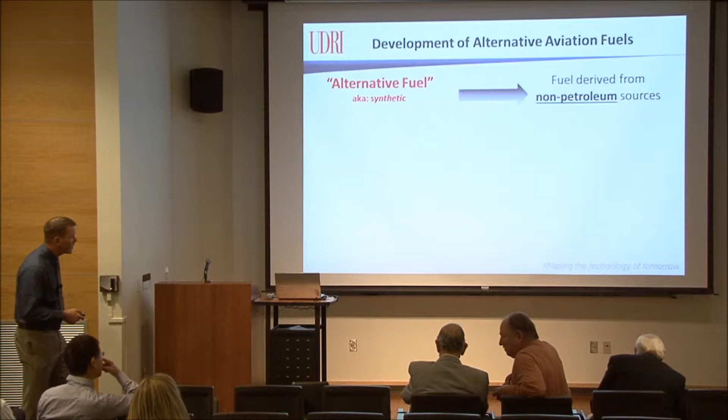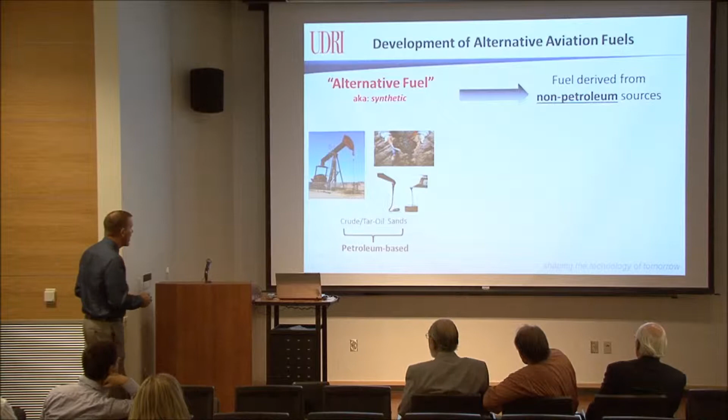So simply stated, an alternative, or you'll hear me use the term synthetic fuel, is a fuel that's derived from non-petroleum sources or feedstocks. Gasoline, diesel, and jet fuel that you're typically used to are derived from conventional or heavy crude oils or non-conventional petroleum feedstocks like tar or oil sands. An alternative fuel could be derived from other fossil sources like the liquefaction of coal or natural gas to liquid fuels, or biological feedstocks like plants, algae, or animal waste.

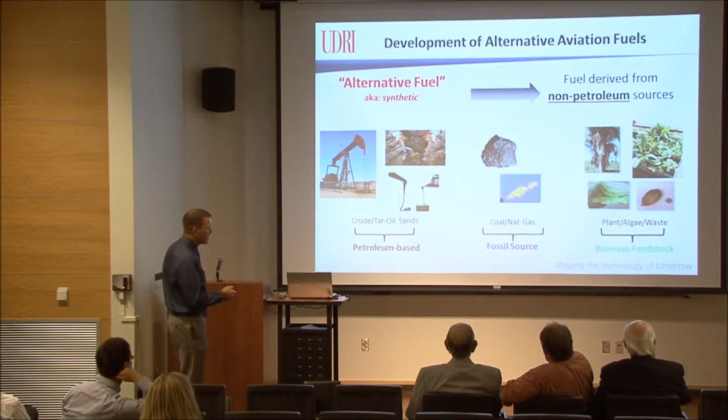Now, this latter category is probably what most of you in the room think of when you hear the term alternative fuel. There are several motivating factors driving the interest in the development and use of alternative fuels for aviation applications, and these can be broadly classified into four primary categories, as recently summarized by Hileman and Stratton in a publication. I'm showing these four categories here in a Venn diagram, and you'll see this consistently with the criteria I show on the next slide, because we need the right combination of these factors in order to have the motivation to pursue the use of these fuels.

Now, for simplicity, the impact or magnitude of each of these factors are drawn to be identical, but they can vary substantially depending upon many factors, like the geographical location where you're producing these fuels.

First and foremost, a fuel has to be economically sustainable in order for us to pursue it. Some of us in the room are old enough to remember the oil embargo in the early 70s. When petroleum products were pulled from the US market, there was a lot of investment and interest in alternative fuel development. But once those crude products went back in, a lot of that investment and interest waned.

There's obviously environmental sustainability motivating the use of these fuels. In particular, many of you probably think of the potential impact of CO2 and greenhouse gas emissions, but it's not only when we use these fuels and burn them, but what's produced or emitted as we're producing these potential fuels. There are other air quality impacts to consider, like the fugitive emissions during the production and burning of the fuels, and an often overlooked resource is the water intensity of your processes—how much water is needed and the quality of the water.

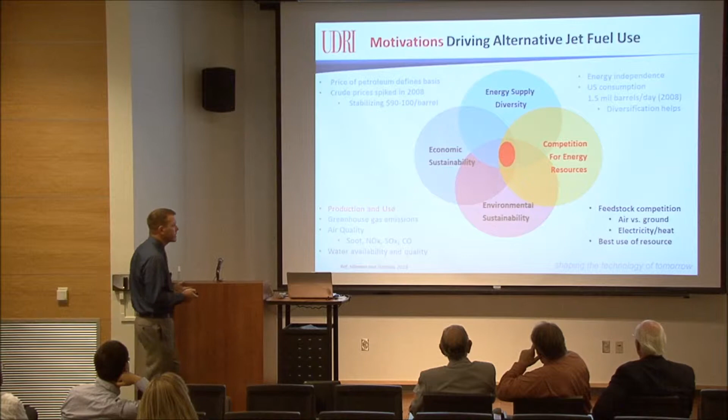This is difficult just due to the sheer magnitude of the volumes of fuels used in this country, but any diversification helps. The last driving force or motivation is the competition for these resources. If a feedstock or a source can be used to produce an aviation fuel, it can probably also be used for ground transportation, or to generate electricity or heat. So what's the best use of that resource, not only from an economic standpoint, but from an environmental and sustainability standpoint?

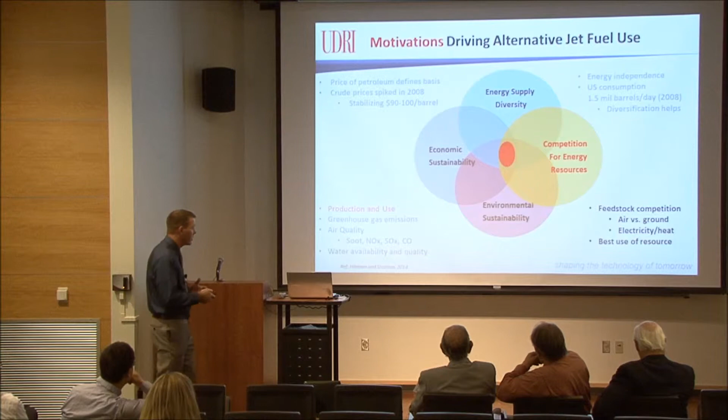So as you would expect, the criteria in which we evaluate a potential fuel echo these motivations very closely. A fuel is only going to be able to be pursued and become sustainable if it's economically viable. This can be complicated by the fact that policy and incentives can affect the prices that go into this, like tax incentives given for ethanol production for gasoline use.

Another limiting factor for the aviation industry is that any alternative fuel that's developed has to be fully compatible with existing infrastructure and aircraft, just due to the longevity of these systems that are used.

So we basically term that they have to be drop-in fuels compatible with the petroleum-derived fuels.

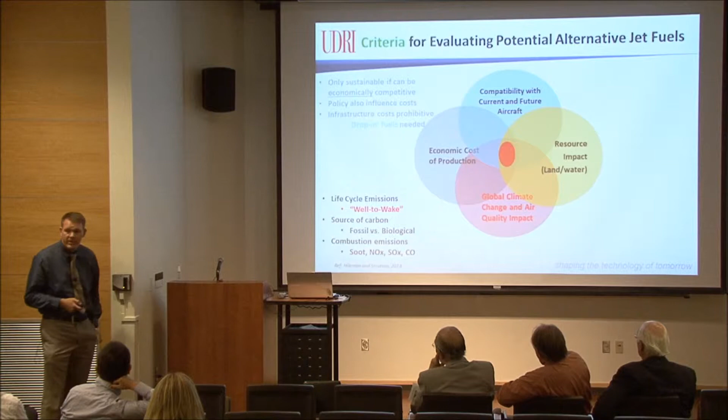There's global climate change and air quality impacts that we have to take into account in our criteria. You've heard this in maybe life cycle analysis or life cycle emissions, and you'll hear the term well to wake—everything from getting that feedstock out of the ground or growing it all the way to what we use it for. What's the impact there? It'll be impacted by factors such as where the carbon's coming from, if it's a fossil carbon or biological source, and the emissions when it's used.

A fuel has to be compatible with both legacy and future aircraft. As I said before, on the economic side, it has to be able to be used in existing infrastructure and aircraft. It has to meet specification fuel requirements—these are properties that when a fuel producer makes a fuel, we evaluate certain properties that have to be satisfied before it can be sold in the open market. It also has to satisfy what we term fit-for-purpose properties, which I'll talk about in a couple slides. And then the other criteria we have to think about is our resource impact.

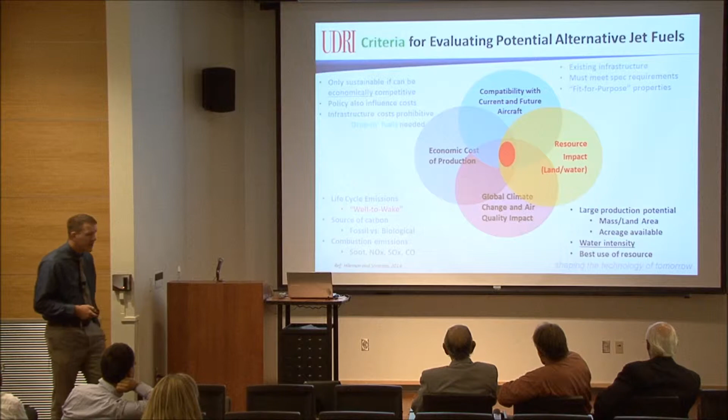We'd like to have feedstocks that have large production potential, but we got to account for the resources that are going to go into those and the best use of that resource.

We have to have many safety of operation requirements due to the conservative nature of air travel. This includes being able to safely handle these fuels on the ground and when we're putting them into aircraft. We have to have good thermal stability characteristics—we basically don't want to foul our fuel passages or nozzles in the combustors during flight. And we have to have good fluid properties, especially at the very low temperatures that can be encountered at high altitude flight. There's a myriad of other properties and characteristics we need, including appropriate fluid properties and compatibility with airframe and fuel system components.

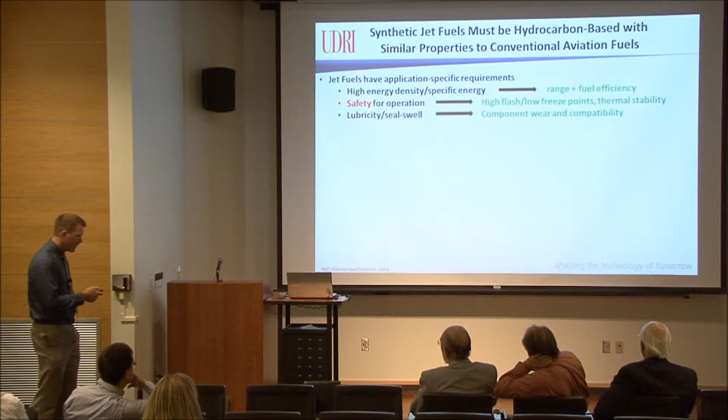So with this in mind, a lot of the fuels or chemistries that you've probably heard of for alternative fuels—biodiesel, alcohols like ethanol and butanol, liquefied natural gas, and liquid hydrogen—are not suitable for aircraft use because of many of these concerns. They're much more suitable and can be implemented in ground transportation applications.

With respect to aviation fuels, the types of chemistry and the compounds that are going to be produced and be viable to be used on aircraft are going to look and smell a lot like the chemical classes and compounds that you have in petroleum-derived fuel: branched and linear saturated hydrocarbons, cyclic hydrocarbons, and aromatics. But a big key here is understanding which classes do you want and which classes are beneficial to be implemented within aircraft applications.

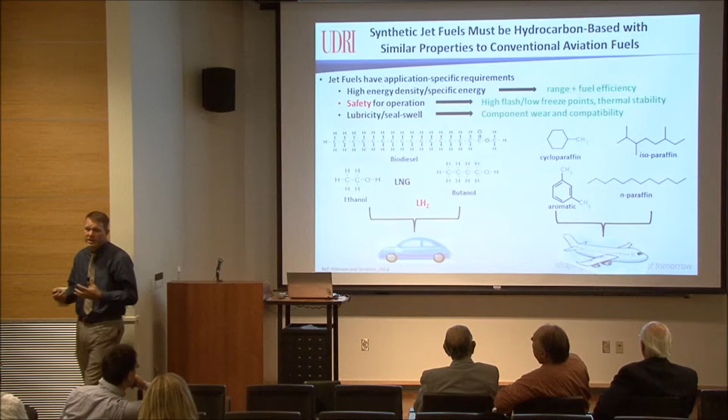There's a myriad of feedstocks and processes that you can use to produce an alternative fuel. Commonality to all these is that they're typically going to require hydrogen addition at some point to remove heteroatoms like oxygen, sulfur, and nitrogen, and right now they're going to have to be blended with petroleum-derived fuels for use. A complication for aviation fuels is that right now these processes can only produce a blend feedstock that can go into petroleum-derived fuel, and each pathway and fuel has to be approved individually.

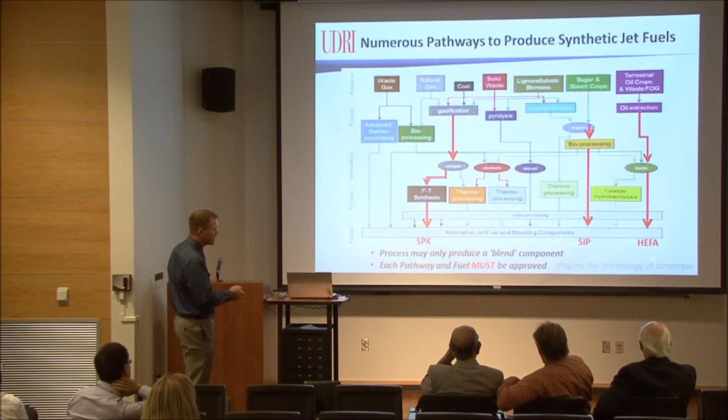Thus far, there have been three pathways that have been approved for use in commercial and military aircraft. This includes gasification of carbon sources to produce synthetic paraffinic kerosenes, conversion of triglycerides to hydroprocessed esters and fatty acids, and the conversion of sugars to synthetic isoparaffins.

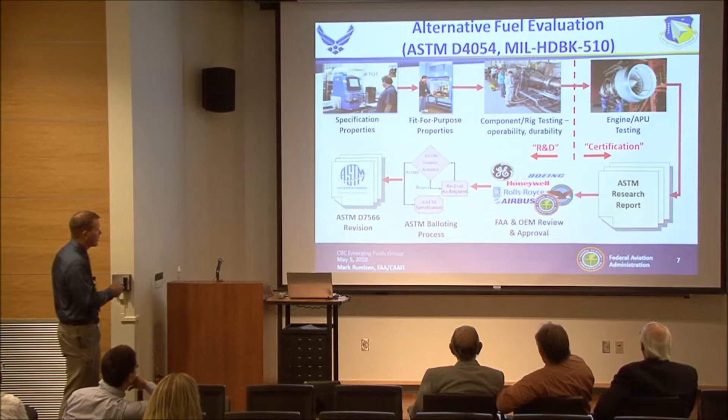To assist in improving the speed and efficiency in which we can get these fuels to market and get them approved, there's been a standard process developed to provide a framework for the certification and approval of new chemistries. These can be divided into two basic areas: research and development stages, where we characterize the physical and chemical properties of these fuels and understand how they're going to potentially impact use on an aircraft, and certification activities, which could include full-scale engine testing, airframe testing, and review and approval.

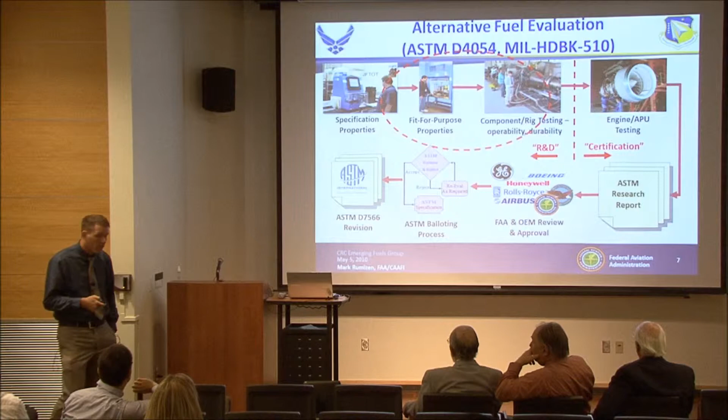Within this process, these upstream research efforts—especially correlating and understanding property-to-performance relationships—are critical, because we can define and learn a lot about the potential viability of an alternative fuel or alternative fuel chemistry using small volumes and relatively inexpensive tests before we scale up. With AFRL colleagues, we've developed a lot of expertise improving these property-to-performance relationships, and you'll see this term again, fit-for-purpose property, so I might as well define it.

For a fit-for-purpose property, what we mean is it's a property inherent to a petroleum-derived fuel that's not controlled by specification. As a petroleum-derived fuel is developed, certain properties have to be evaluated to sell it on the open market. Those properties were defined such that as long as those primary properties were satisfied, secondary and tertiary operational requirements of these fuels would be inherently solved.

But this isn't guaranteed when we introduce alternative fuel chemistries into use. It's not feasible to directly evaluate all of these characteristics during procurement, but as the end user, you want to make sure you're getting the performance that you need.

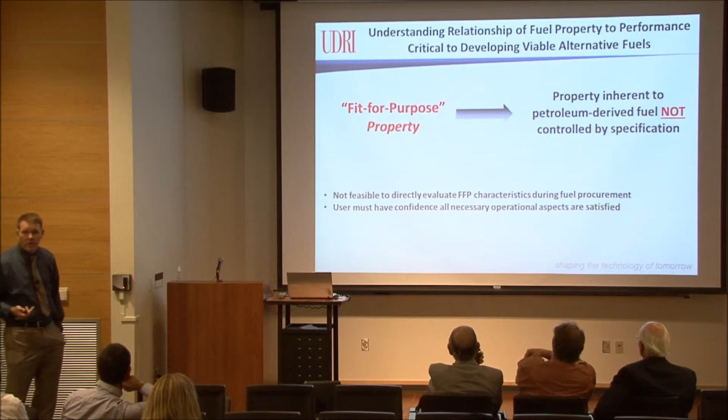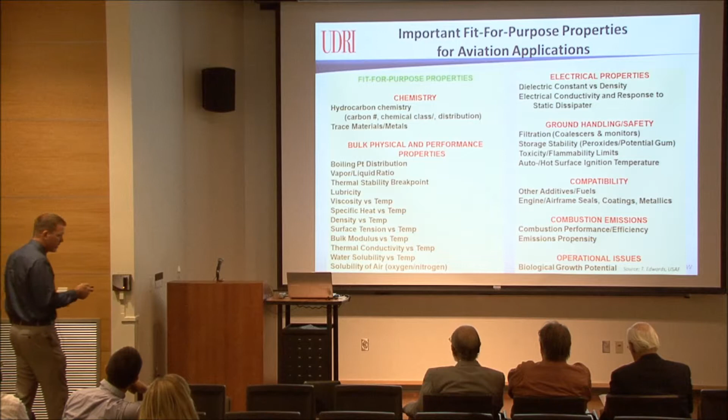These are areas where we've developed a lot of expertise and helped advance the knowledge with both DoD and Air Force colleagues, but also other OEMs, airframe component and engine manufacturers. I want to touch on some of those areas and give you a highlight of some of the accomplishments we've made. But before I do that, I want to mention a very important occurrence.

About 10 years ago, the Air Force made the strategic decision to certify all of their aircraft fleet for operation with a blend of petroleum and synthetically derived fuel. This was a major undertaking, involving activity from the research effort all the way up to engine and aircraft OEMs to flight certification. A lot of this work was initiated out of AFRL with our direct support and contributions, including understanding property to performance relationships and how physical properties vary with blend ratios.

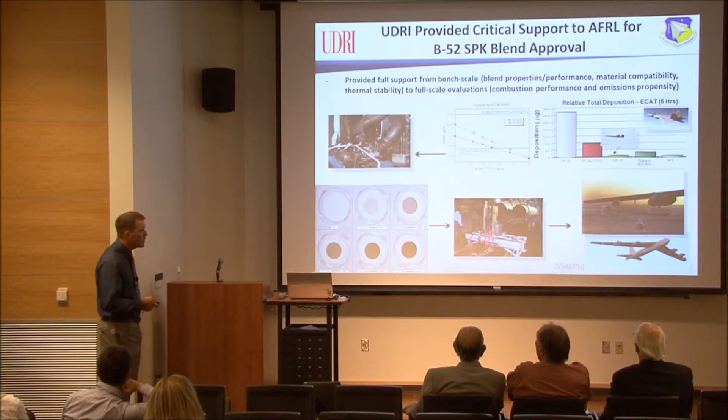We did a lot of the initial combustion evaluations to make sure the fuel would burn satisfactorily. One of the things we observed was the potential for reduced sooting or particulate matter emissions with these fuels. We supported extended durability and on-wing testing on the B-52, the first aircraft platform certified for alternative fuel use, by performing emissions measurements. I mention this because it really catalyzed interest both from a government and military perspective, but more importantly, a commercial perspective to pursue, approve, and certify alternative fuel use for aviation applications.

As far as some specific examples of areas where researchers at UD have made substantial contributions, I've mentioned a few times the relationships of property to performance. How does specific chemistry affect our operational needs? There are conventional techniques that exist for characterizing fuel chemistry, but for the level of detail we need for some of these new chemistries, conventional techniques won't suffice.

So researchers like Rich Striebich, Zach West, and Linda Shafer with us are developing and improving analytical techniques such as multidimensional gas chromatography. What that allows us to do is separate these fuels all the way down to the individual molecular level, which gives us a much better opportunity to correlate composition to performance.

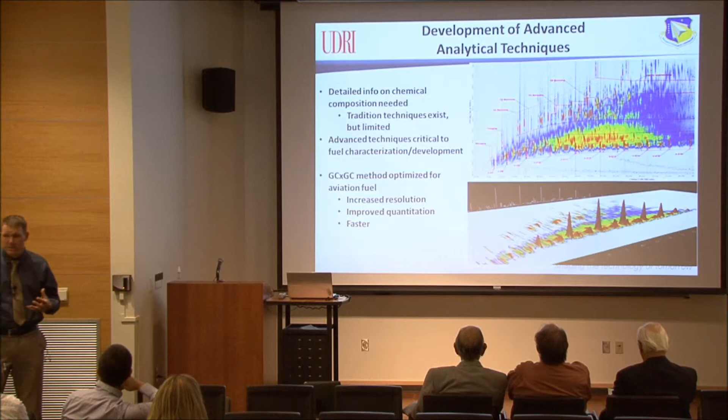Obviously, a need you have from these fuels is efficient and effective combustion performance and thrust. You want to be able to fly your aircraft. We've done a lot of work with aircraft OEMs and AFRL understanding how fuel chemistry will affect combustion performance, using research combustors both at AFRL and here on base.

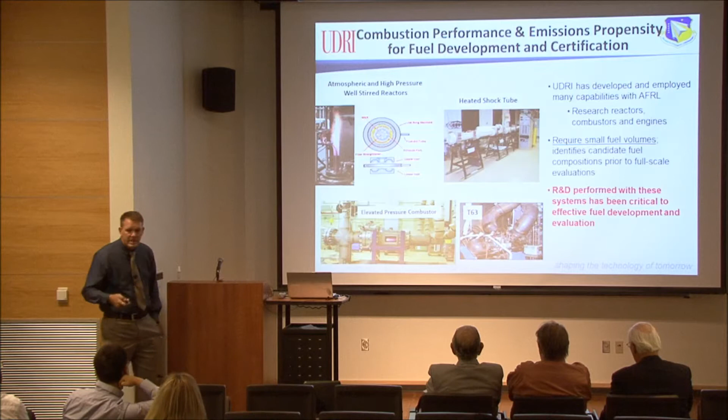We've worked with AFRL and engine manufacturers like GE Aviation to develop advanced capabilities like this elevated pressure combustor developed by Scott Stouffer and colleagues, where we can evaluate and do robust R&D regarding the effect of fuel chemistry on performance in large-scale engines. The R&D performed provides critical information to aircraft OEMs that these fuels will or can have the potential to provide the required performance.

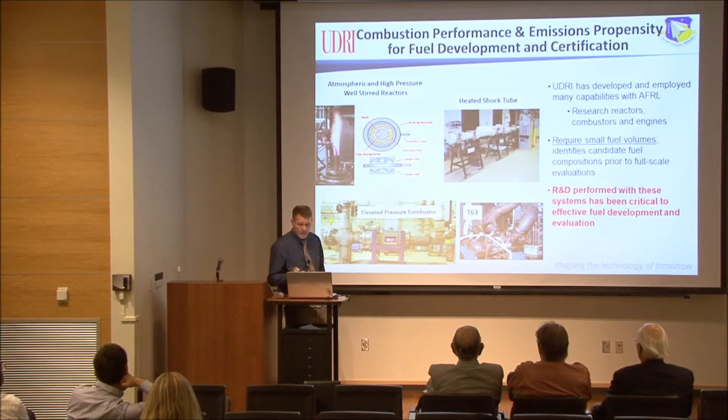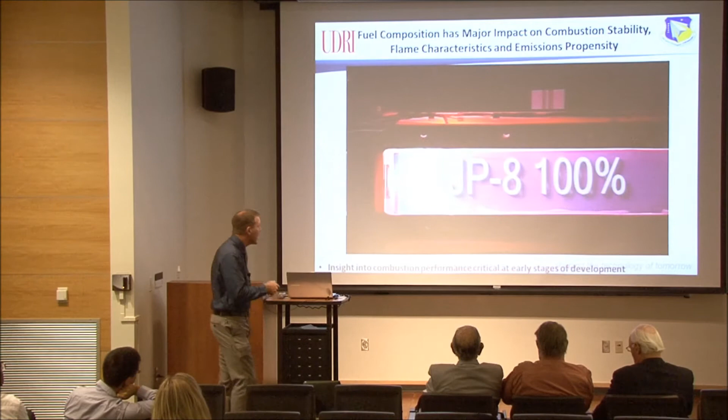So just to give you an idea of the type of insight we can get on a fuel: I'm showing here testing we did with an atmospheric combustor operated with petroleum-derived military fuel. We see good stability in the flame, but downstream we can see sooting and particulate matter production, basically the soot that would come out of the back of the engine.

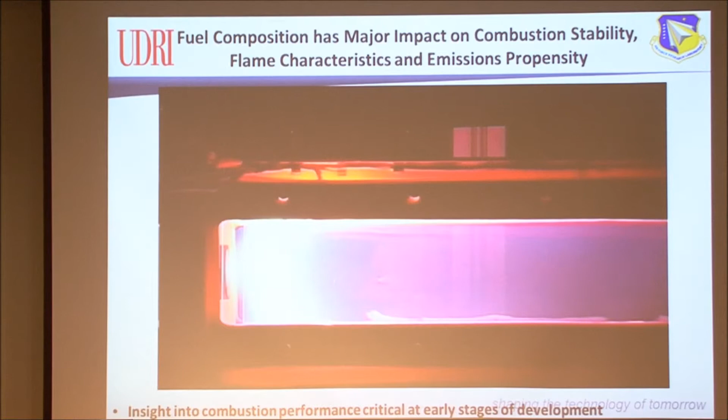Operated with the synthetic paraffinic fuel, we have good stability in the flame and good characteristics, but you see a substantial reduction in downstream emissions. This is beneficial because it shows the potential benefit of reducing particulate matter or soot emissions that come out of these engines both on ground and during flight.

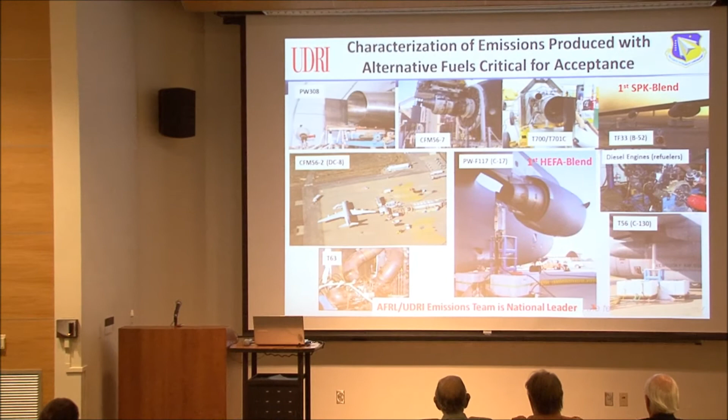With that in mind, with AFRL under Edwin Corporan's leadership and team members like Chris Klingshirn and Joe Mantz, we've developed advanced capabilities to fully characterize gaseous and particulate matter emissions, both in the laboratory and on wing and on aircraft engines.

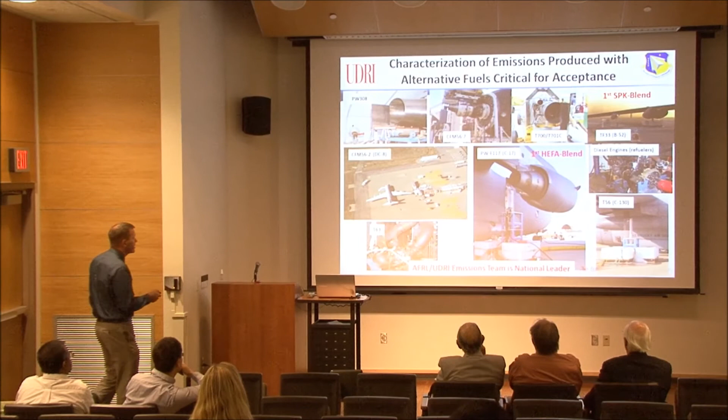These aircraft engines have been deployed around the country—GE Aviation here, various government facilities, Pratt & Whitney—and we're very proud of the capabilities we've developed to characterize potential environmental impacts of these fuels, including the first emissions evaluations of full-scale alternative fuel blends on both B-52 and C-17 aircraft. I think it's fair to say we're a national leader in this work.

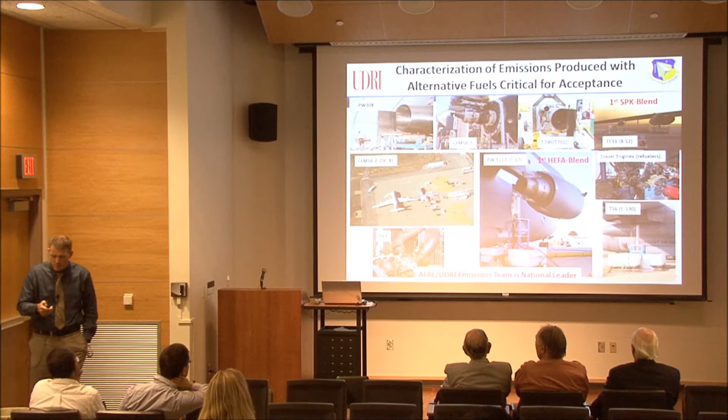Another area where we need good property-performance relationships is compatibility with fuel system components and aircraft engine components. This is a photograph of emissions testing we did with a NASA DC-8 engine.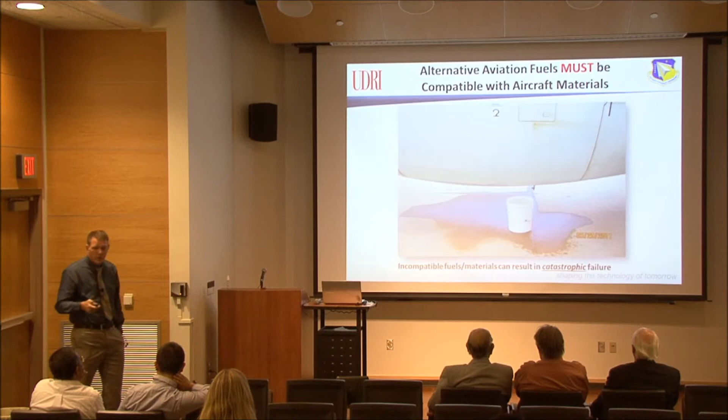We fueled this aircraft and engine with a synthetic fuel. We came back the next morning and fuel was dripping all under the wing and on the ground. Obviously you wouldn't want this happening before your flight, but more importantly during your flight. So understanding and identifying the critical characteristics these fuels need to ensure good material compatibility is critical.

Researchers like John Graham here at UDRI are developing advanced capabilities where they incorporate real flight system hardware, like these fuel system couplings, and expose fuels and different fuel chemistries to simulated in-flight conditions to predict and correlate the ultimate performance.

He's also improving ASTM techniques, like taking this large-volume, long-duration seal swell test and being able to do it with much smaller amounts of fuel and shorter durations, improving that iterative procedure.

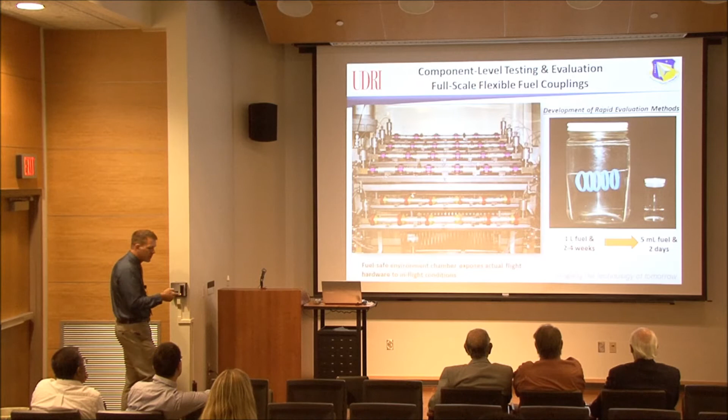An area you may not know of concern for hydrocarbons is the potential for contamination in these systems. This can be detrimental because we can have degradation of materials, and we can also form biofilms that plug filters and impede fuel flow.

We've been doing a lot of work with AFRL looking at the impact and understanding of the property-to-performance relationships, either beneficial or detrimental, to biocontamination and biogrowth within these systems.

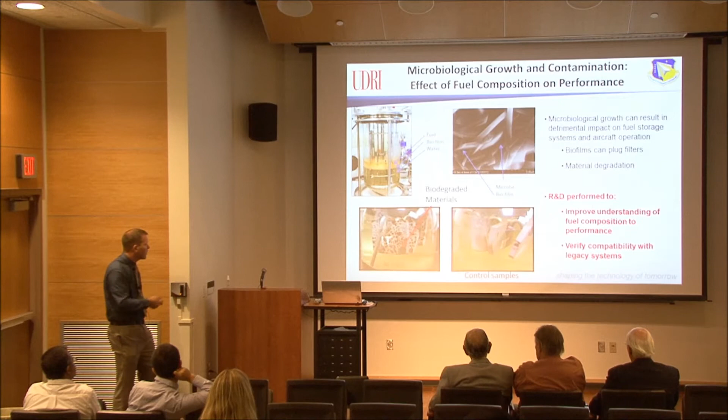The last slide I want to mention is from a different division I work with at UDRI—the Energy Technologies and Materials Division under Sidhu's leadership, with researchers like Moshan Kahandawala.

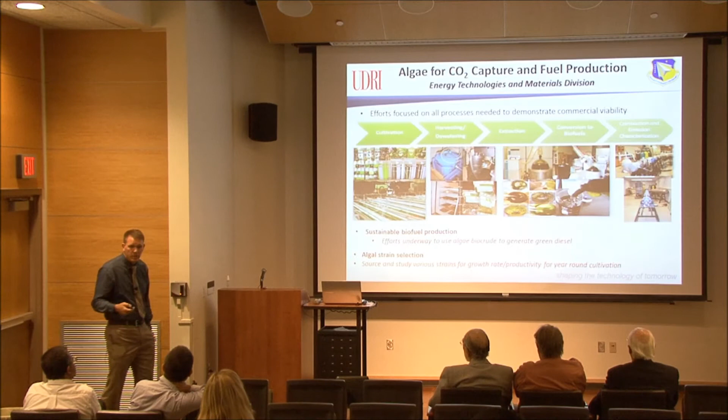They're looking at using algae for carbon capture and storage, and subsequent cultivation, getting to a point where they could potentially produce a fuel that could be used for ground or aviation applications. This is an area where we collaborate and interact directly with them to better understand the potentials of these fuels and try to put it all together.

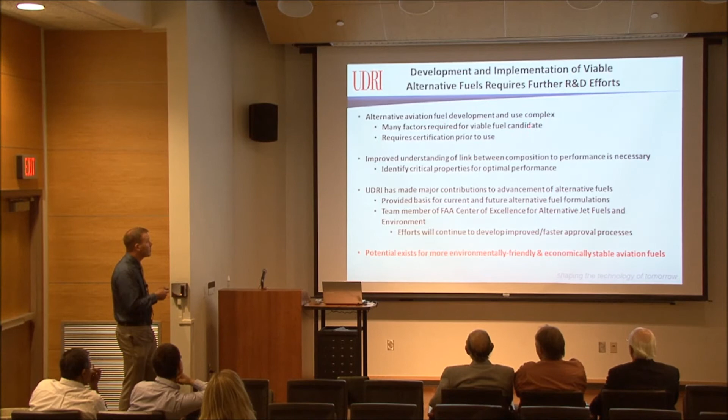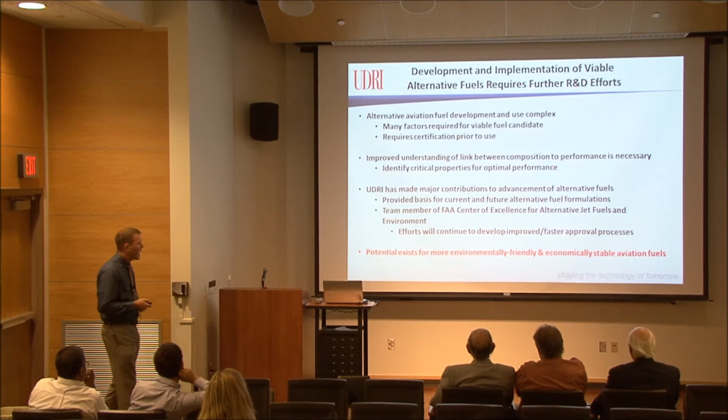So just to summarize, I appreciate everybody bearing with me through this talk. Hopefully I've impressed on you that development of alternative fuel candidates and chemistries is complex. Many factors are required to have a viable fuel candidate, and you have to certify and approve these fuels before you can use them.

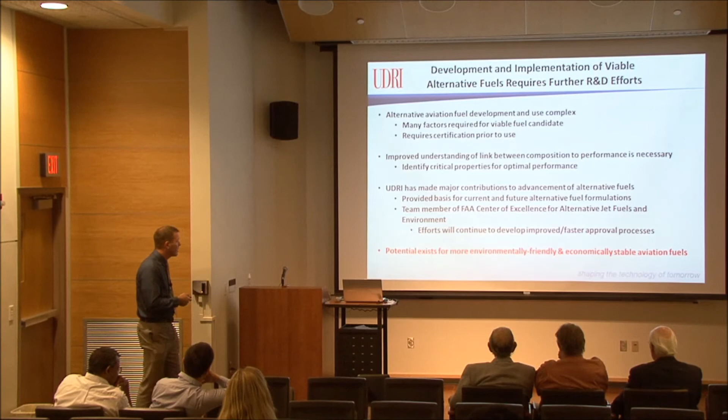A major area where you can make a lot of economic benefit and technological improvement is improving the understanding of property-to-performance relationships, where we have done and continue to do a lot of work. We're very proud at UDRI and the university of the major contributions we've made in this area that have provided the basis for currently approved fuels, but also future fuel formulations.

This is evident by our inclusion in the recently established FAA Center of Excellence for Alt Fuels and the Environment, one of whose primary goals is to develop improved and faster approval processes to get these fuels to market. In general, the potential exists for more environmentally friendly and economically stable fuels.

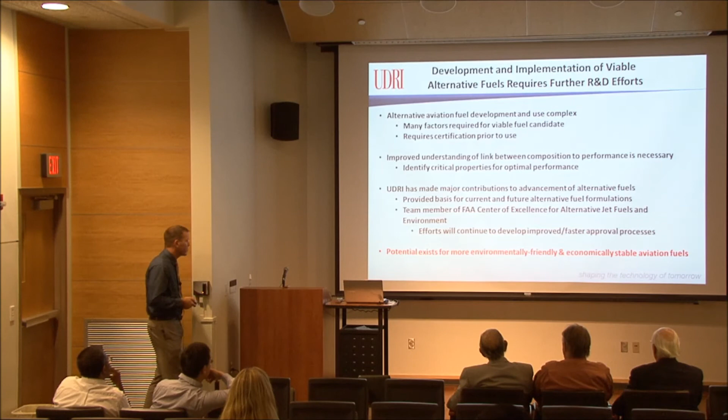So to sum up, if there's one thing you take away from this talk, it's that I'm solely responsible for all of the good work that's come from Alt Fuels. But that's as far from the truth as possible—I couldn't even begin to do this slide justice.

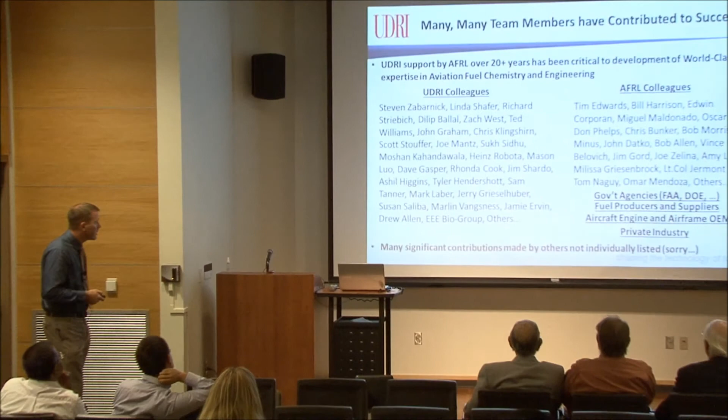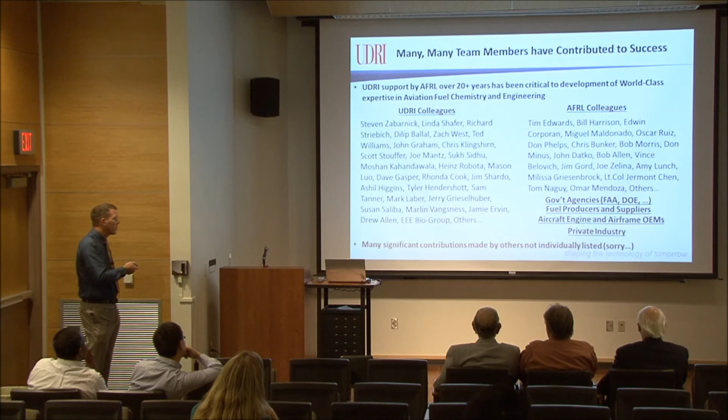There have been so many individuals within UDRI and UD, including Steve Zabarnick, our current division head, and Dilip Ballal, our previous leader in this area. Lots and lots of AFRL colleagues, Tim Edwards, Bill Harrison, the primary leads over there, government agencies, fuel producers and suppliers, aircraft engine OEMs, and private industry have all contributed to this—it's truly a team effort to bring this work together.

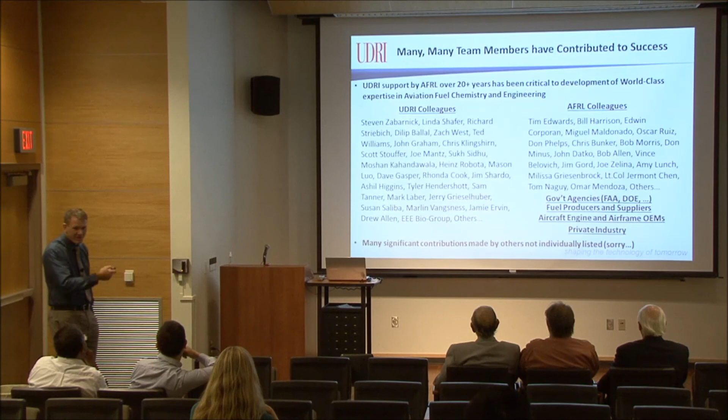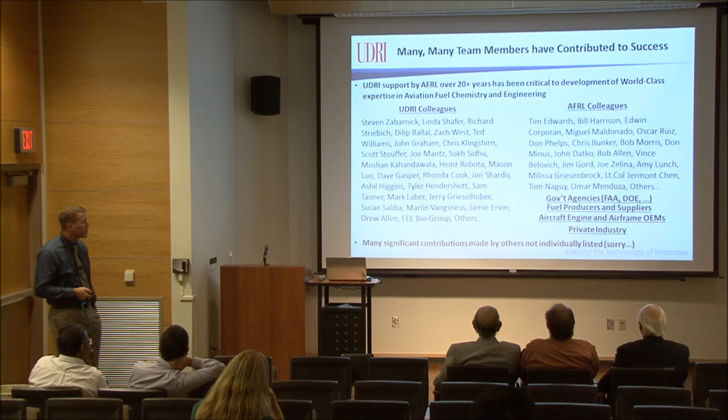We're very appreciative and proud of our long-term research and professional relationship with AFRL that's helped us develop our world-class expertise in aviation fuel chemistry and engineering. Thank you, Matt.